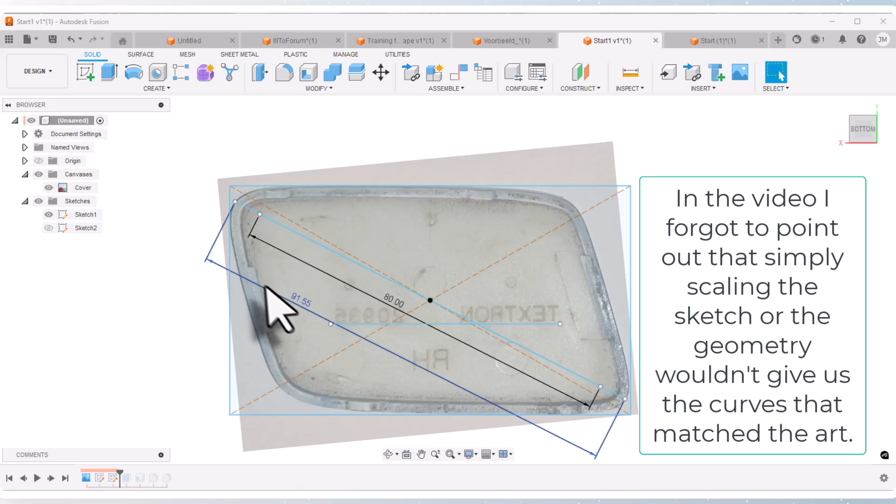So we have a canvas that measures 91.55 diagonally from this corner to this corner. The size that we want actually is 80 millimeters. Now I've gone ahead and created it with this different size, so I extruded my geometry, let's see how far I extruded that. 3 millimeters, and then shelled it by 2 millimeters, and then added some fillets.

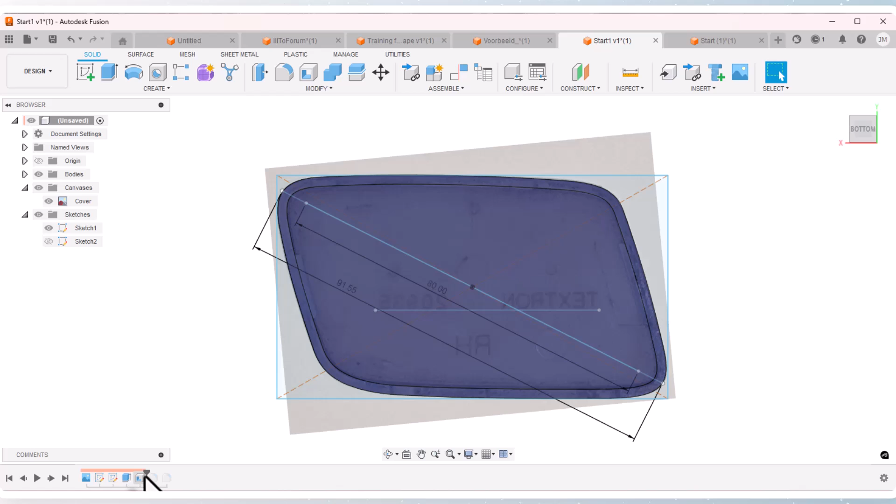So I'll put a couple of fillets on here. Let's turn off the canvas. And so here is the part that we have. Now let's go and see how we could do this at a different size.

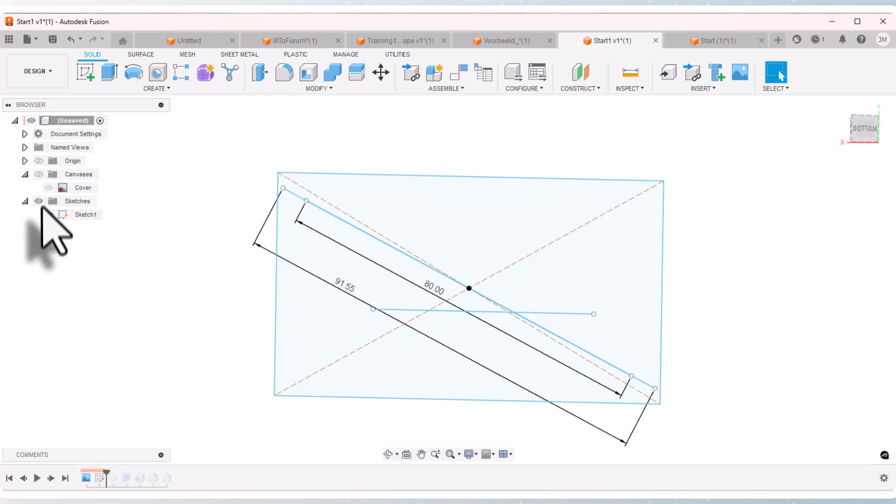So I'm going to drag the timeline back to this first sketch, and I want to move this first sketch before the imported image. I put this straight line in here as well because there is some text in the image, and I wanted to make sure that this text was horizontal. So I rotated the image to get it to horizontal.

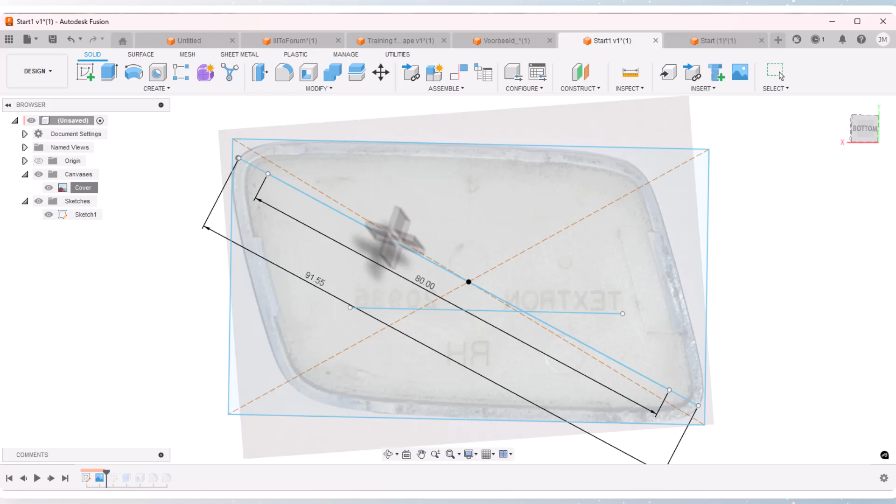But let's drag the sketch before the image, and I'll right click in the browser and calibrate that image. I want the distance from here to here to be 80 instead of the 91. So I'll put in 80.

And so now that image, we see this point right here and this point right here, and that's 80 across that image. I also edit that canvas, and I rotated it to get this text horizontal relative to this horizontal line. So I've got the image on the canvas set up the way I want it.

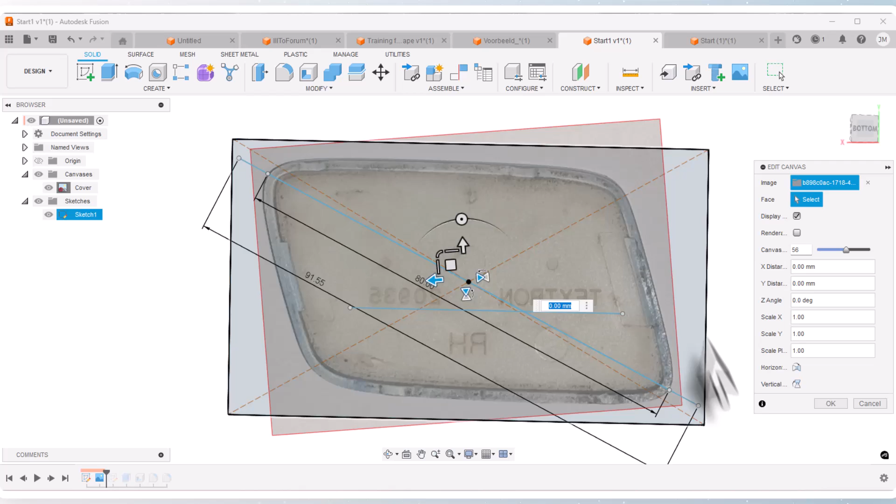Now I want to sketch the geometry, so that's all I needed sketch number one for. Actually I might want to resize this rectangle to show the bounding box of where the part is going to fit. But that's just for a visual reference, a sanity check that I can measure with my calipers to make sure I'm modeling this at the right size. That's all I needed that sketch for.

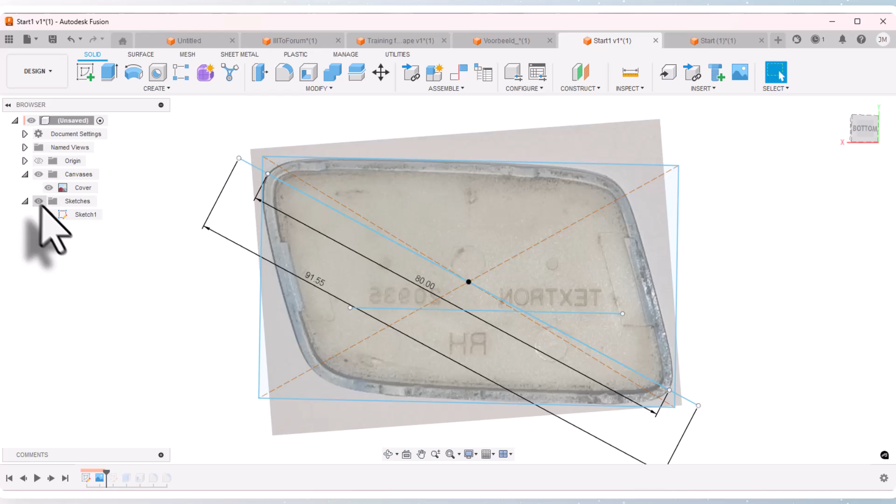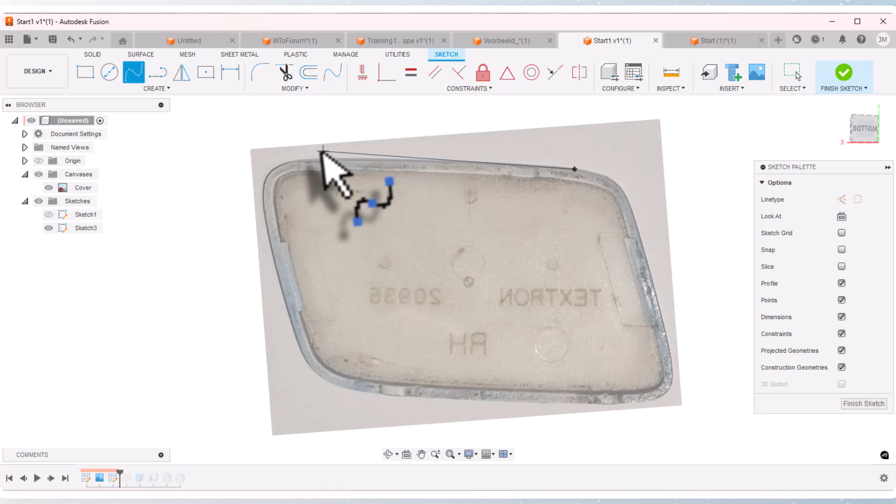I'll now hide that sketch, and I'm going to create a new sketch. Now I've already done this once, but I'm just going to do it over again. So I'll create a new sketch on the XY plane, and I'm going to do a spline. There's a big transition right about here and a big transition that starts right about here. I'm just going to eyeball guess about where that starts and ends, about right there, about right there. Now I can move things around after I get this sketch.

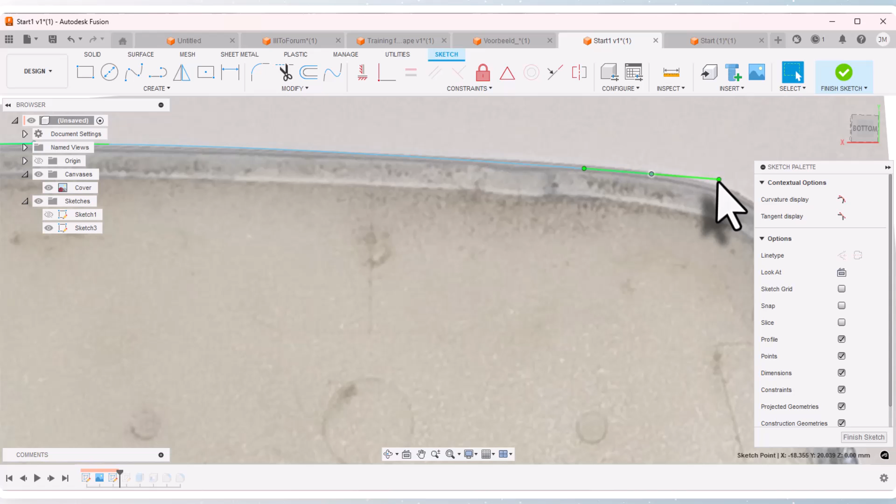Now I'm going to go ahead and say okay. So my spline looks like a straight line, but notice these handles on the end of the spline, which I can now drag to make that spline match the artwork or the imported image as best I can. So I can change the angle, and I can also change the weight, or the influence that handle has on the spline.

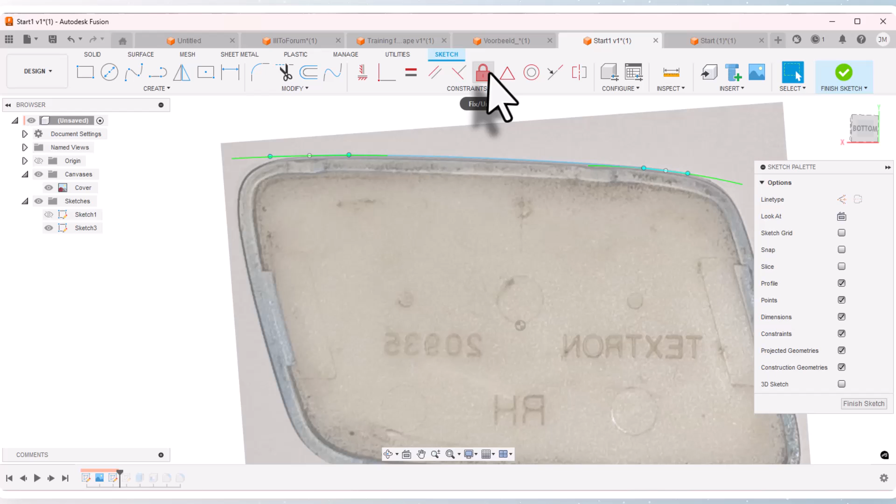Once I get it about where I want it, I'm going to lock that spline in position. Now normally I would put dimensions on here, but this is all artwork, I don't have any precise dimensions. So I'm going to lock this spline, and when I do that, notice that it turns green. That's the color that indicates it has a fixed or locked constraint on it.

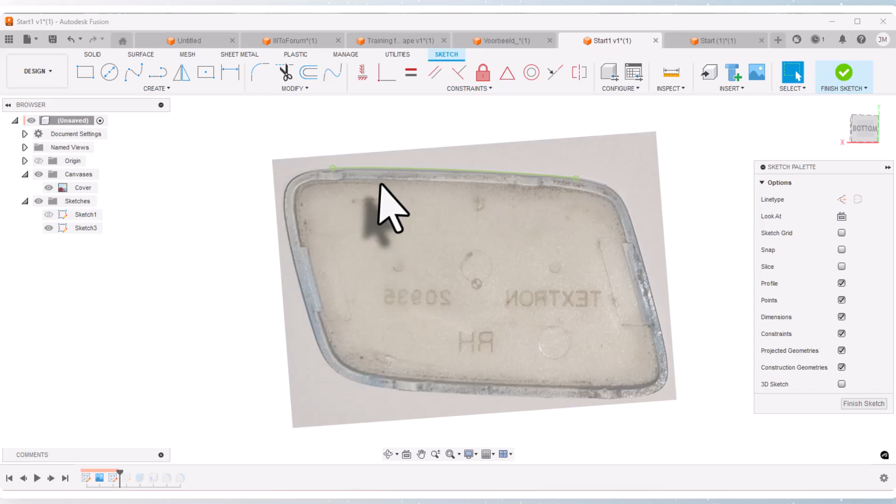And so then I'm going to do the same thing down here, and I'll do the same thing over here, and over here. So let's go ahead and do this one. I'll do a spline, and it starts to really transition about right in here. So I'll click about right there and about right there. I want to use as few points as possible on my spline.

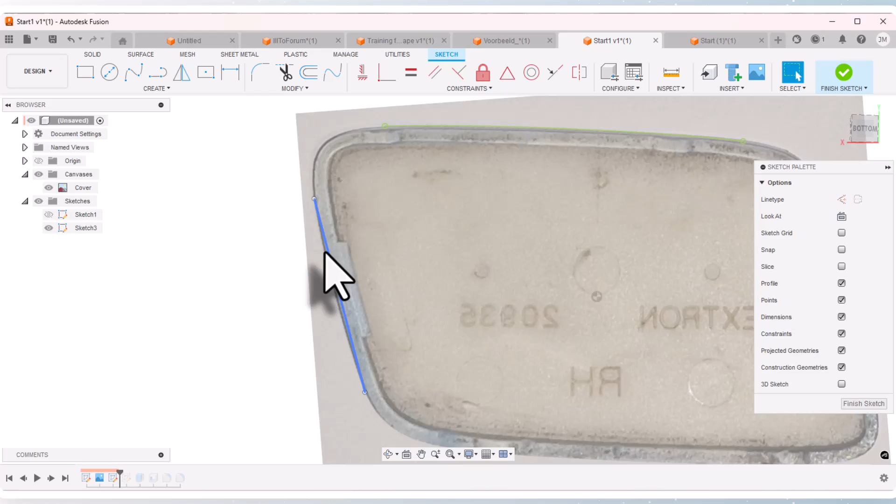In this case, I'm only using 2 points to define my spline, a beginning point and an end point. Beginners make the mistake of adding lots of points to their spline - that actually makes it more complex, not more precise. All right, so I've got that spline about where I want it.

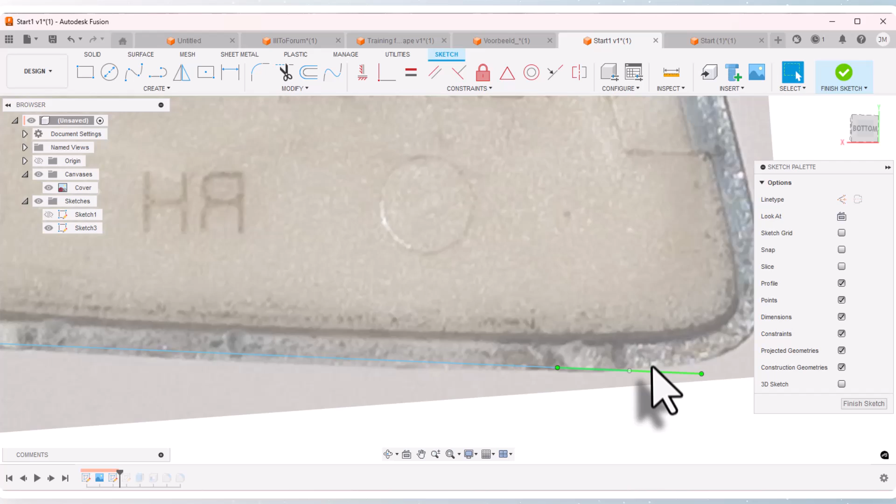I will now fix that spline, and I'll do the next one. So I'll do a spline from about right here over to about right here, and I'll drag those handles, the weight and the angle, to try to match this curve. Okay, that looks good. Maybe adjust it a little bit on this end.

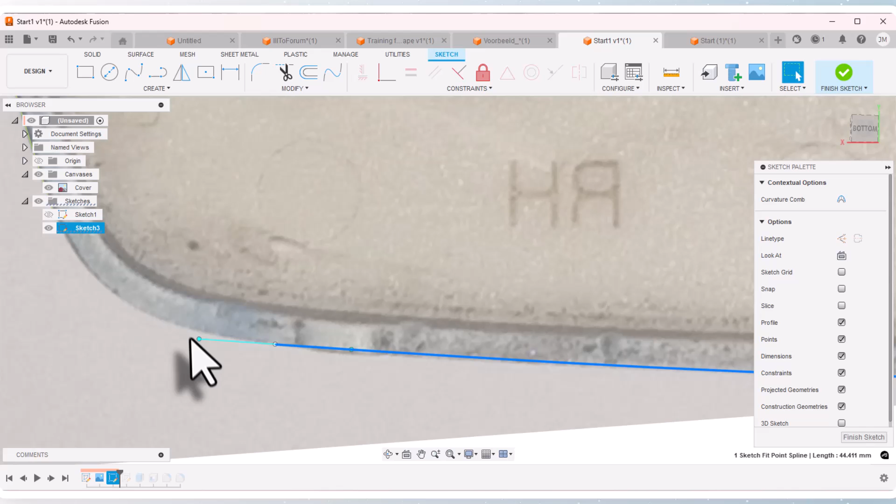And I had a little bit of trouble getting that. What I might do is lock down that point, so just lock the point itself, not the spline, so that I don't accidentally move the point. Okay, so I got that about where I want it.

So I'm going to lock this spline, and then I'll do this last one over here. Now you can always unlock this. This is a toggle, so you click on it to turn it on or click on it to turn it off. And then I'll do one more.

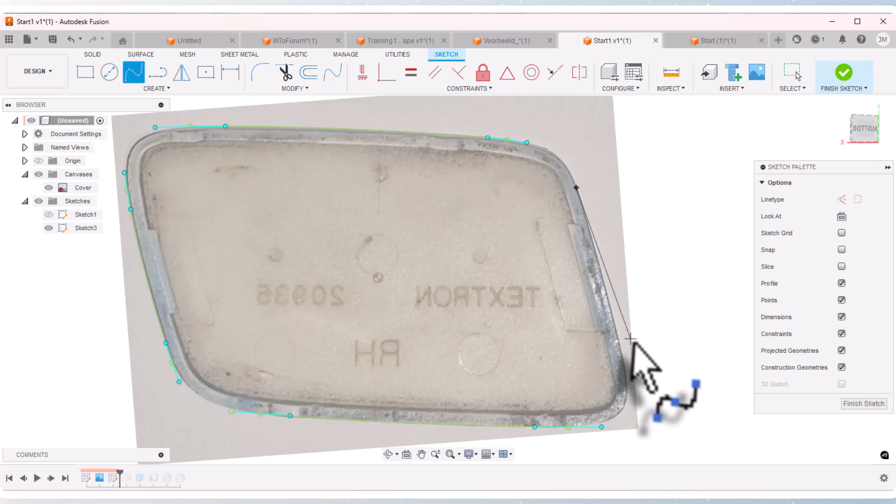I'm going to do it from here over to about here. I'll accept that, I'll adjust this handle. Okay, that curve looks good. It looks good down on that end. I'll lock it.

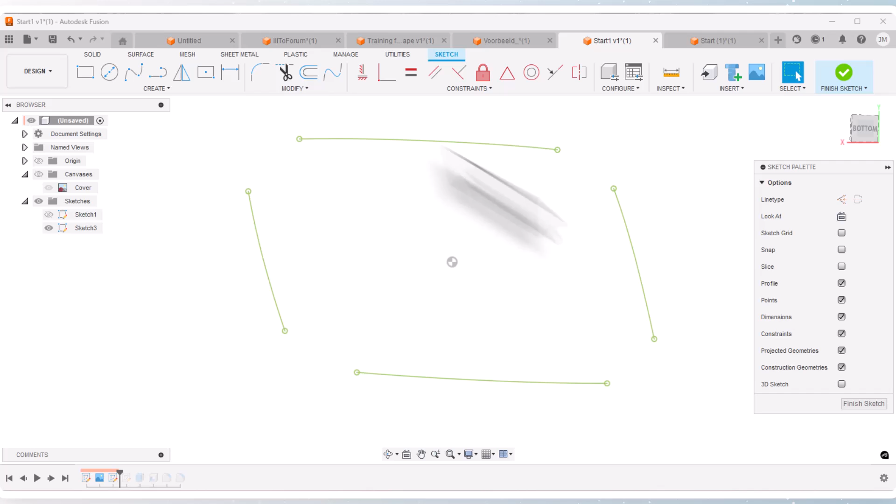All right, now I need to connect these curves together. And it might be easiest to see if I first just turn off that image. So I want to connect those lines together, or those splines. So I'm going to draw a line from here, or a spline from here to here, just the beginning point and end point. And let's go ahead and do that on all four of these.

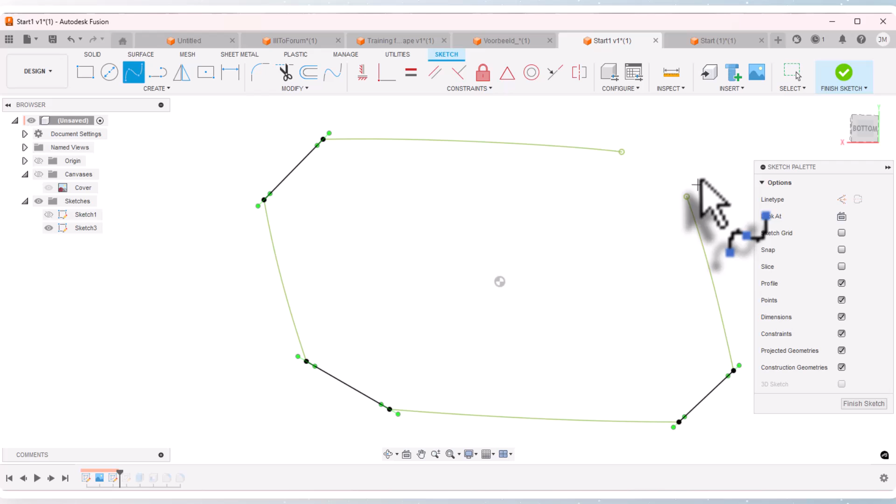So I'll do this one from here to here. Spacebar to end the command, spacebar to get the command back, spacebar to end the commands. Actually, it's still in, so I don't have to hit spacebar again. And there I got my four splines.

Now let's turn that image back on. And so we'll adjust the handles on this one. And I'll adjust this handle a little bit. And I'll adjust this handle a little bit. Okay, so I got that to where I want it. And then I'll do the next one.

And so I'll adjust these. Now, if I need to, I can unlock any of my splines that I've created so that I can adjust those. So this is an iterative process to get it to look good.

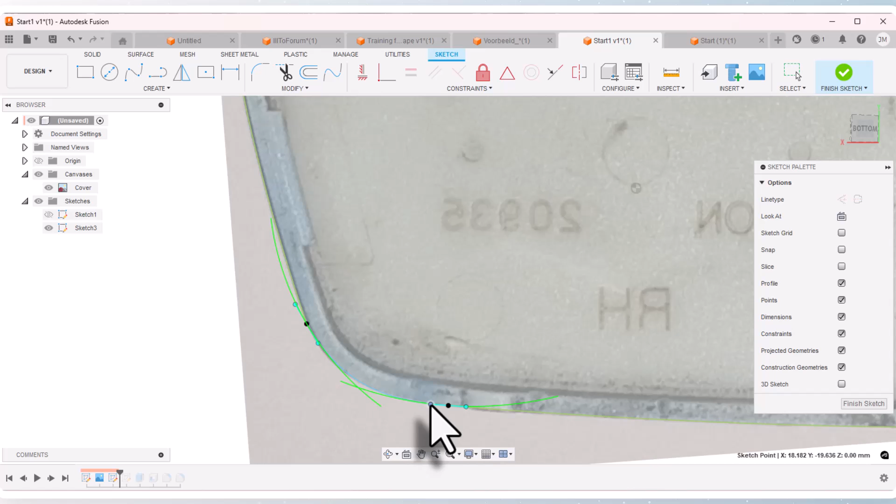Now, actually, I forgot something that I wanted to do, so I'm going to undo those last few steps. I'm going to undo back to where these look like straight lines. Okay, so now that looks like a straight line.

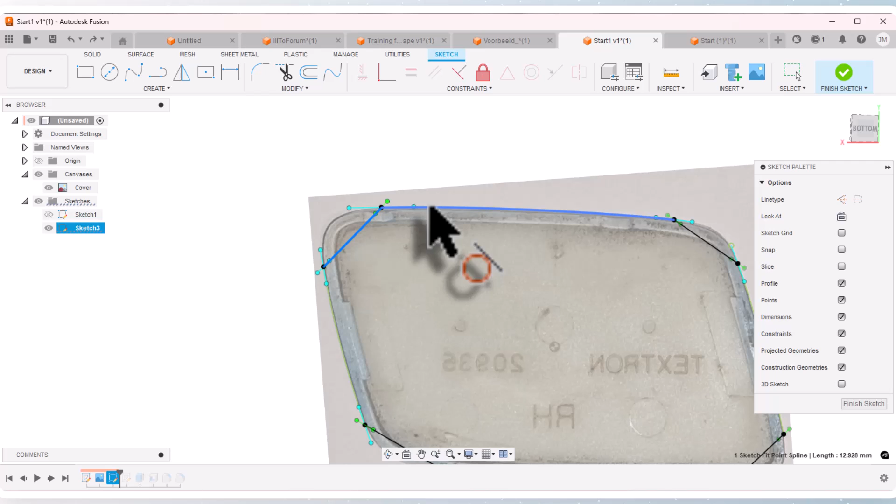I'm going to do a tangent on there. So I want to do tangent between this curve and this curve, and I'll do tangent between this curve and this curve. Now I don't like the way it made that tangent, so I'm going to undo that last step, and maybe I...

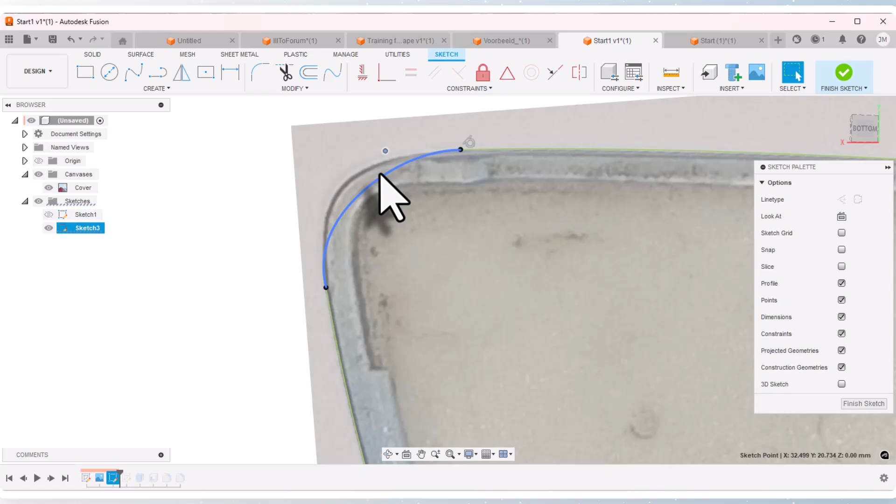Want to make this, drag this handle around close to where I want it. And so let's adjust these handles. Okay, so I'll get this handle.

All right, now let's add that tangent in there. So I'll do tangent between this curve and this curve. And then I'll go back and check that.

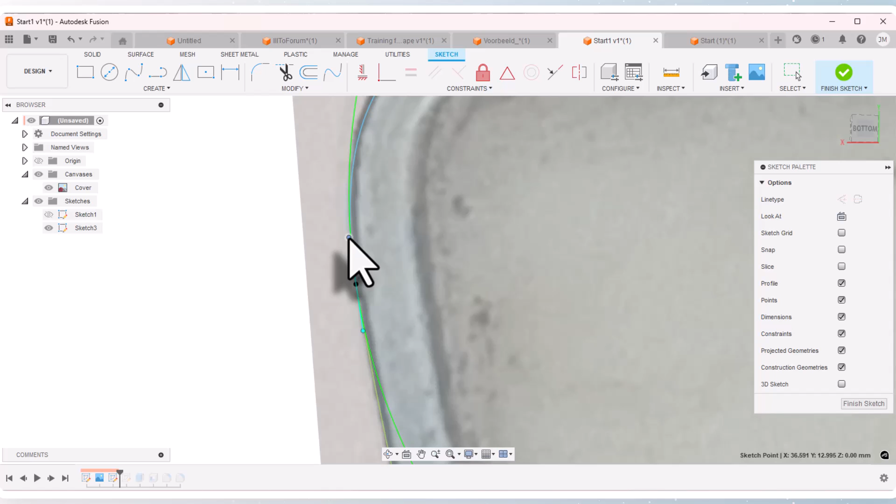So I need to adjust this handle a little bit. I need to make sure I get the handle for this curve, not the handle for this curve. And so adjust that. Okay, but I want these two curves to be tangent to each other. That's why I added that tangent constraint to the curve.

I'm going to drag this out a little bit further, angle it down a little bit. So I'm dragging the angle, dragging the weight of that curve. All right, so I've got that one. And then I'll do the next one.

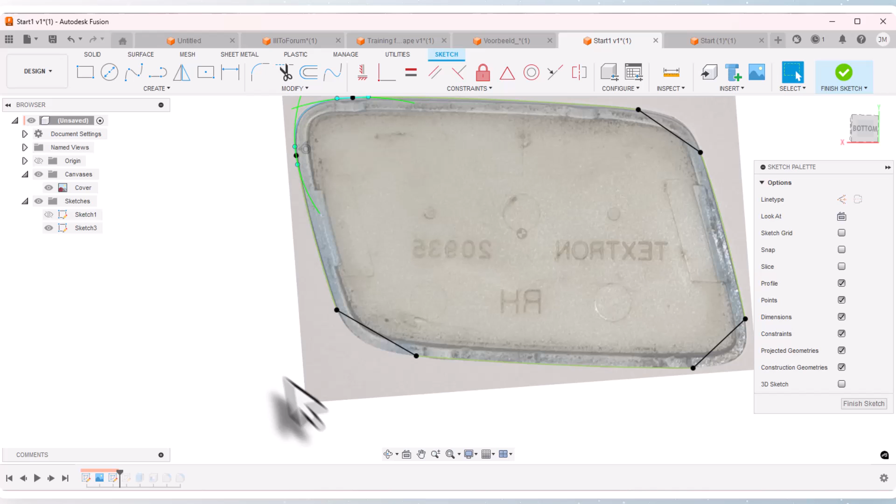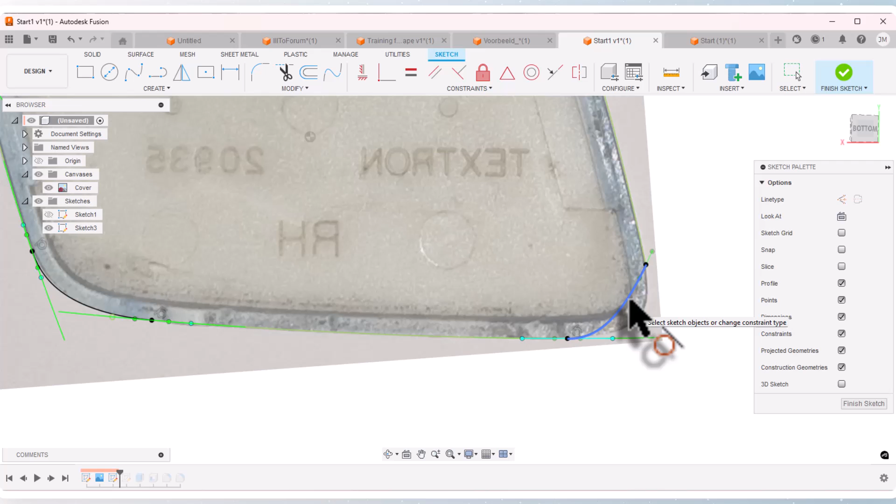So I'll do tangent, and I want this curve to be tangent to this curve, and I want this curve to be tangent to this curve. And I like the way that looks just as it is, so I'm not even going to make any more changes to that one. I'm going to make this one tangent to this one, and I'll make this one - that might not get the right tangent. Let's try it. Okay, it got it.

And then I will drag that down a little bit. Okay, so I need to actually see, because it's tangent here, I can't change this angle as much as I would like, so I'm going to leave that one where it's at, and I'm going to drag this handle and get this out here.

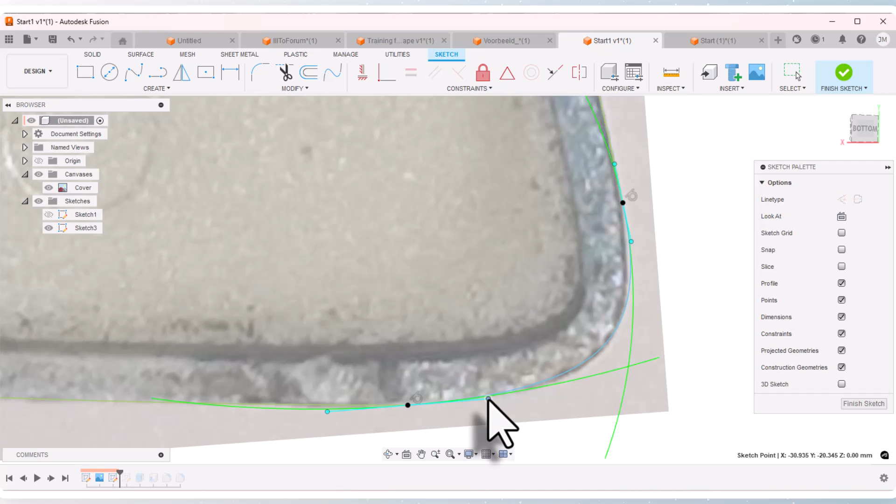Okay, so I like that. Actually, it's a little bit too far. I like to drag this in back this way some. And I want to make sure I got the right one, so I don't want the handle on this one, I want the handle on this curve. So I drag that back.

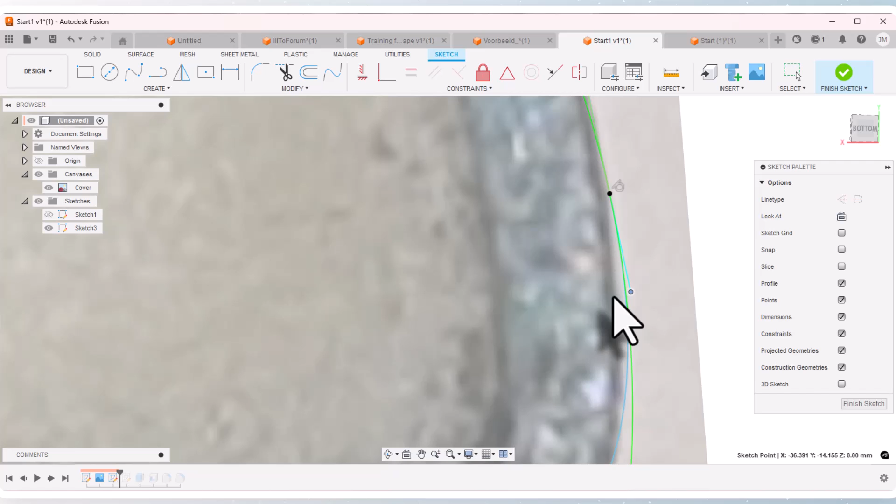And it's only letting me change the weight on this one. I must have got the tangent between the handle and this rather than between the curves. But that looks pretty good right there.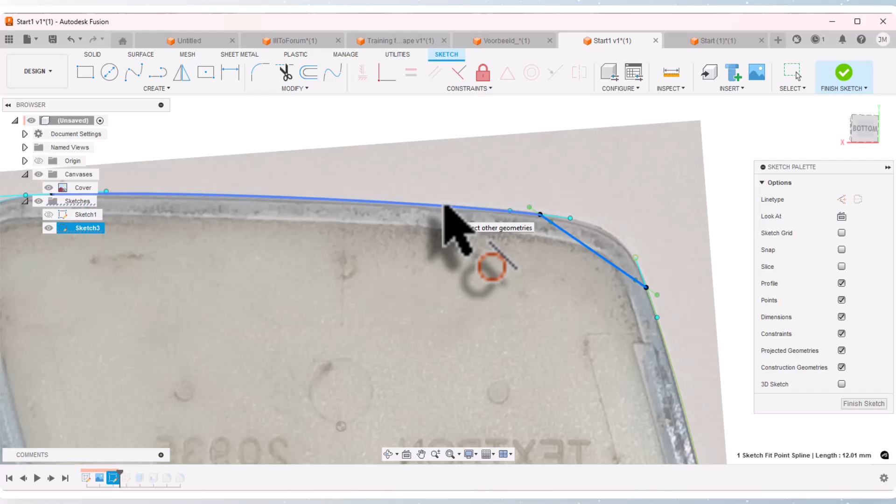Let's try that. All right, and then I'm going to get this last one. So I'll select that and I'll do tangent. Actually, let's select the tangent first. I want this curve to this curve, and this curve to this curve, and then I'm going to drag that handle out a little bit.

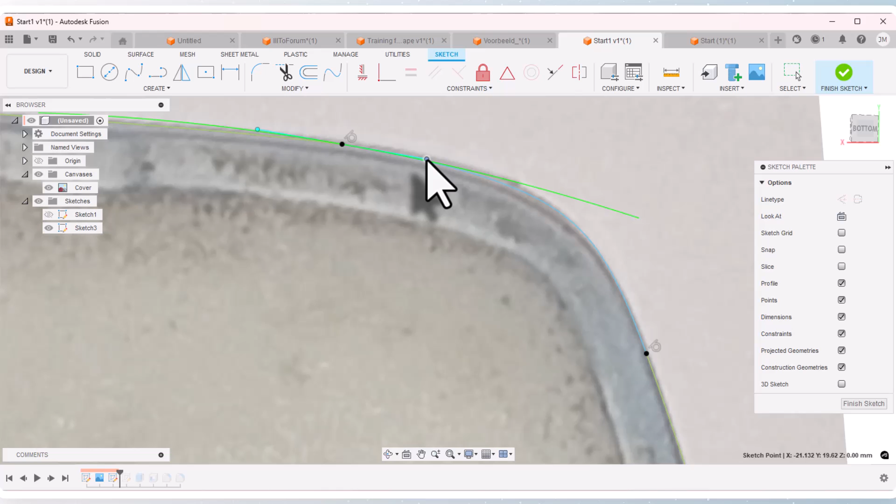It's not letting me drag that one. Let's try this one over here. Okay, there we go. All right, I got that looking pretty good there.

Okay, I can turn off the visibility of my canvas now, and I'm going to extrude this. So I'm going to extrude, and I'm going to go 3 millimeters.

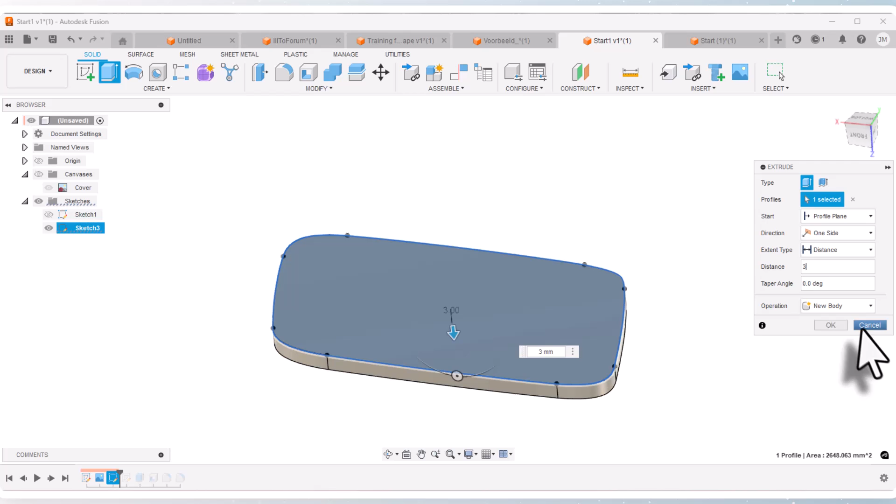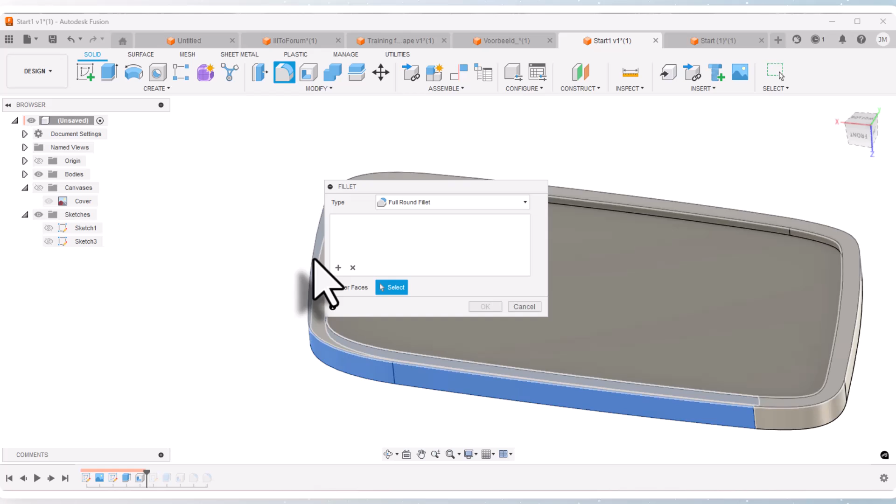And then I'm going to do my shell. I'll select that, I'm going to do 2 millimeters. Now, if it's 2 millimeters from here to here, the maximum radius we could put on here is 1, because 1 plus 1 equals 2. Now, it may or may not let us do that as a radius of 1. Let's try it.

So I'm going to select, I want to do a fillet. And I'll select this edge, and this edge. Now notice it isn't going all the way around, so I'll also select this edge and this edge, and this edge. Now maybe we could select that face instead of selecting these individual edges - that would select all of those edges at once. But I've already got them selected, so I'll go ahead and put it in.

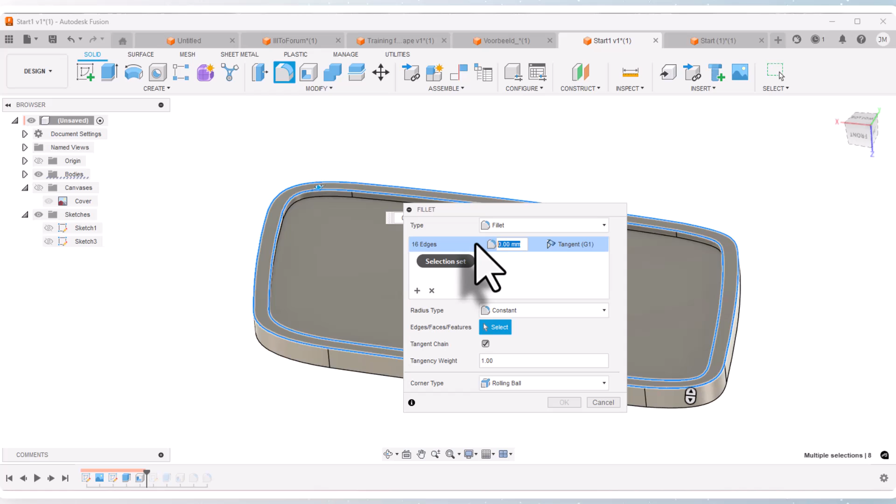I'm going to try the 1 millimeter, and it accepted it. If it didn't, I would put like 0.9999, that's essentially 1 millimeter. Let's rotate this around, and let's put a fillet on this end or this side.

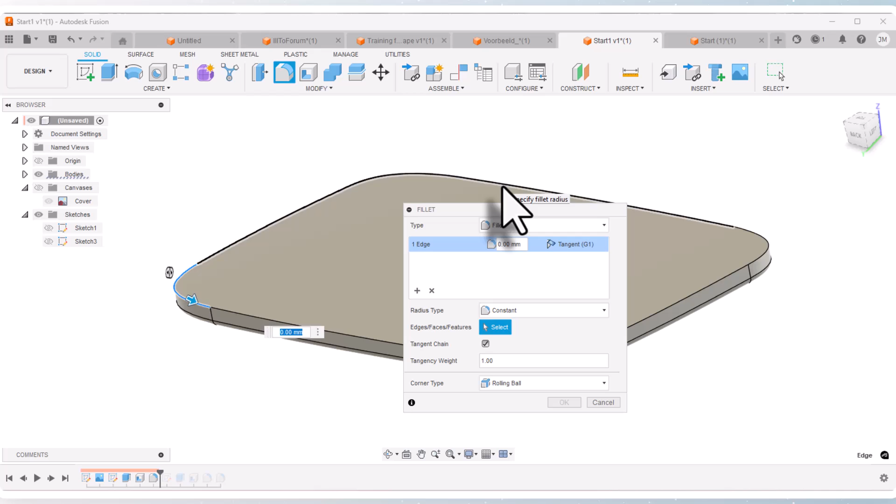And again, I'll go around here and select these edges. I could select the face, and that would select all of those edges at once. Let's do that as 1 millimeter. And maybe if we wanted this one as 2 millimeters, whatever we want here. Now we'd have to be careful on the size of the fillet that we put in here.

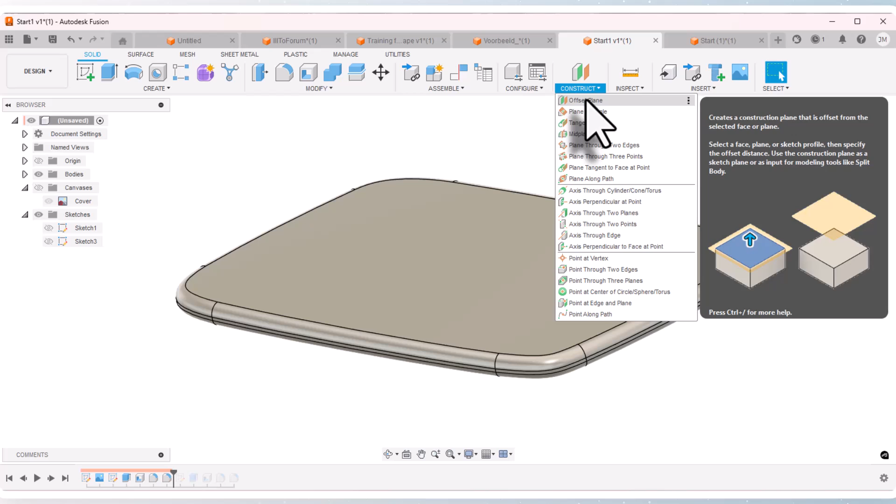If we look at this in a section view, we'll go to inspect, and we'll do a section view going through the middle of this thing. If we put this fillet too big, it could come where it would go through this point right here, and it'd give us an invalid result if that occurred, if we put that fillet too big.

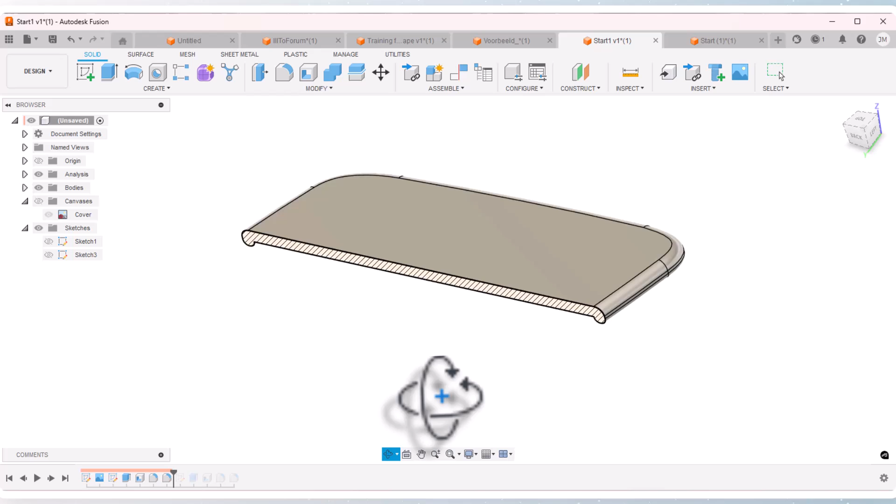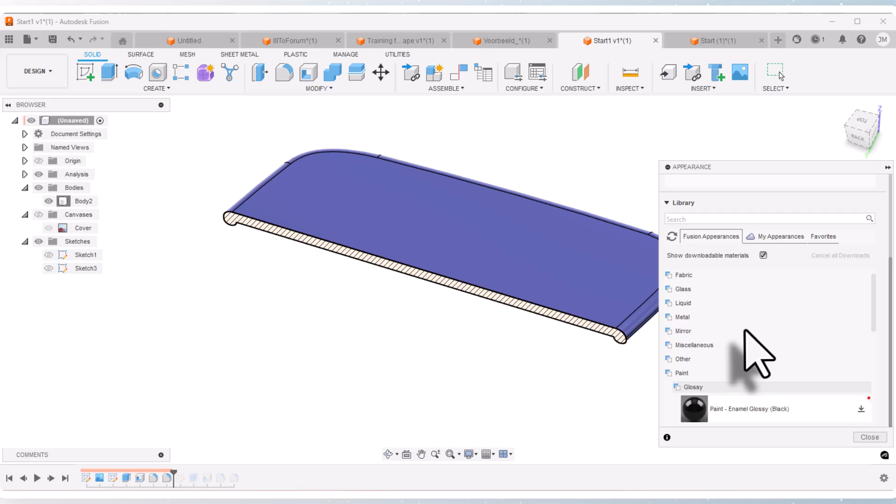All right, then if we want to change our color of that body, we just go to the properties or the appearance of that body, and we can pick a color appearance in the list of different colors down here. I used a paint, so go into the paint and glossy paint, and we see here's a bunch of different colors that we could use to apply, or something that looks like a material, say a fabric, if we wanted that. Now that's just an appearance, it doesn't change the actual geometry.

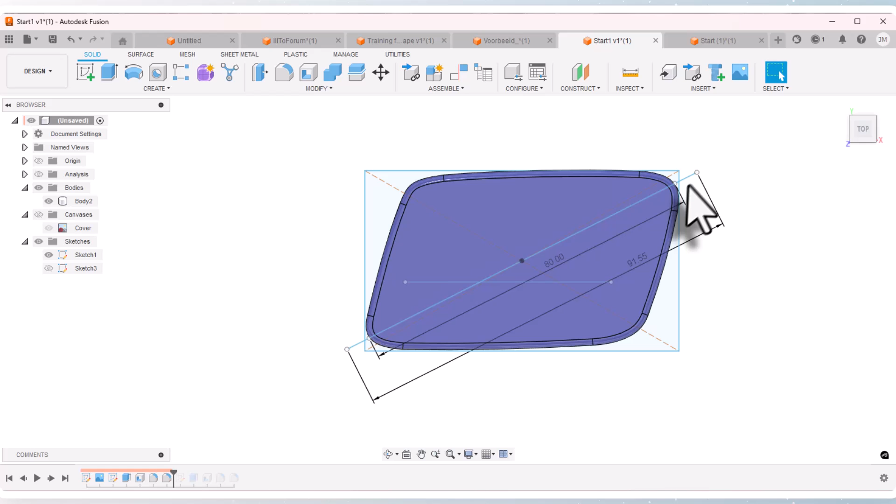And let's leave that analysis, and so there is our part at our new size. If we go back to sketch number 1 and we turn that on, and we'll go around and look at this, we see that that's now 80 millimeters from corner to corner, where originally I had it 91.55.